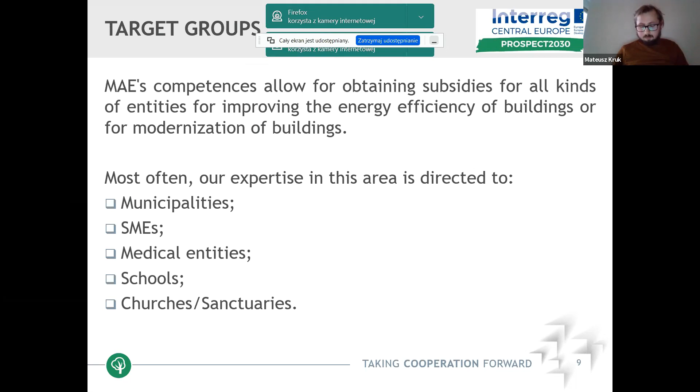For the entities I mentioned, the funds most often used, and one that we mostly use, is the Mazovia Regional Operation Program, and it's for municipalities, powiats, public entities like hospitals, churches, museums, mostly for increasing energy efficiency and using renewable energy sources.

Co-financing is up to 80% of eligible costs for every entity. Of course, there are other funds that we use, and the second one that is mostly used, also for municipalities, is the National Fund for Environmental Protection and Water Management. The other entities are church legal entities, museums, hospitals, and cultural buildings.

Money can also be provided through loans, which are up to 100% of eligible costs mostly, and can be subsidized, up to 95% of co-financing of eligible costs. Of course, it's not for all of the entities that I pointed out, but for most of them.

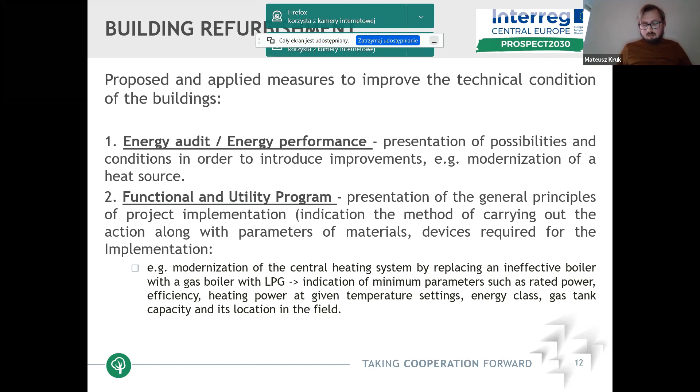A good example for modernization of the heat source would be, as seen beneath, replacing an ineffective boiler with a gas boiler. That should indicate, for example, minimum parameters such as rated power, efficiency, heating power at a given temperature, energy class, gas tank capacity, and its location in the field.

And the final and more refined document is construction design, or detailed design. That document shows the complete specifics of the project, and is also additional to the full drawing documentation. Those documents show how to properly install devices or perform the thermomodernization activities.

Construction design consists of selected fittings and devices. It should also have attached catalog cards of the devices we are using, for example, in modernization of the boiler, pointing out the specific device used. It also should have a site plan and conceptual drawings.

To the construction designs are commonly attached two documents: the bill of quantities and the investor cost estimate for construction works. These documents are linked with each other, because the investor cost estimate is mostly elaborated on the basis of the bill of quantities.

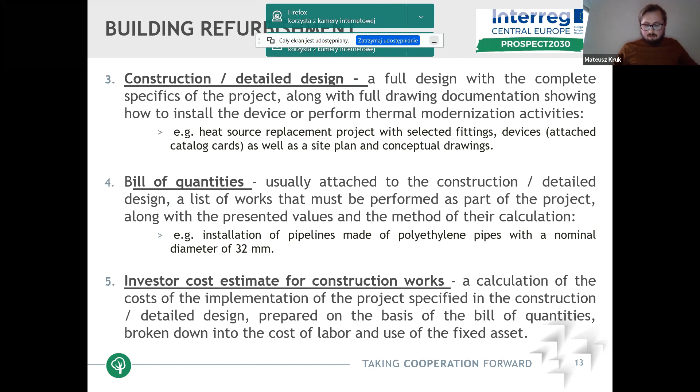Many entities need finance, so many entities look for our assistance just to get financing. For building refurbishment, we can have financing from several methods. We can subsidize from national funds, which were mentioned a few slides before. These funds are the most popular.

There are also loans from domestic funds, which are used when entities have their own financing but want to expand it over a longer period. Commonly, loans are combined with subsidies.

Physical people can also apply for funds to energy refurbish their buildings. So for subsidies and loans, physical persons can also apply for donations or loans.

There is also an energy loan, which is a mechanism for small and middle enterprises based only in the Mazovia region. It is an important ingredient to this whole fund, because it acts as a formal and content operator in the field of energy as an expert. This is a low interest fund that can finance small and middle enterprises to do building refurbishment.

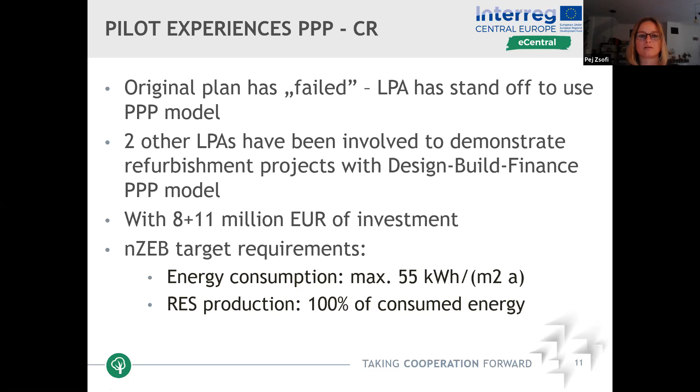So these are ongoing projects, but it seems that they will be financed, luckily.

Regarding the Hungarian case, sorry, is there a question? No, you just have one minute left. Okay, one minute and one slide, it's okay.

So the Hungarian pilot is also a case that failed regarding the selected building for the energy performance contracting refurbishment. It was a small building, partly already refurbished. The negotiations with the ESCO company were very, very long, and the involvement of additional buildings became necessary to ensure a proper return.

But the newly selected buildings were also not perfect, and several months of downtime caused problems due to the municipal elections last year. As I said, in Hungary we have very low energy prices, so it is very difficult to put together an acceptable building package for ESCO companies.

The third pilot case is in Velenje, Slovenia. This is the first case when Slovenian municipalities tried to use a crowdfunding model for public building refurbishments, and this was a brand new story for them.

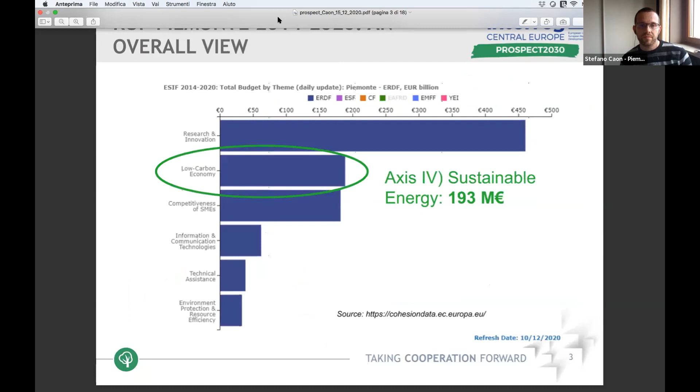The axis for sustainable energy was the second one by resources. In fact, the total amount was 193 million euros. We had 2 main priorities: priority 4B was for enterprises, and priority 4C was for public buildings and public infrastructures. All the calls of the 2 axes are now closed because the money is over.

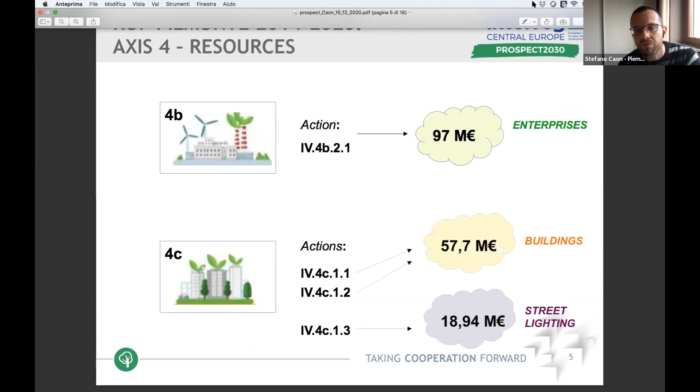But nowadays we have some additional budget coming from the public procurement procedures, and we are currently deciding how to use it and how to allocate it. As you see, every priority is split into one or more actions. The action for enterprises has a total amount of resources equal to 97 million euros. Then nearly 60 million euros were for buildings and nearly 19 for street lighting systems.

Let's see some information about the call for enterprises. The call was opened in 2016. It was recast this year, and the beneficiaries were small, medium, and large enterprises. Not all activities were included. We gave them an 80% loan and 20% grant, with a maximum funding intensity based on the enterprise dimension.

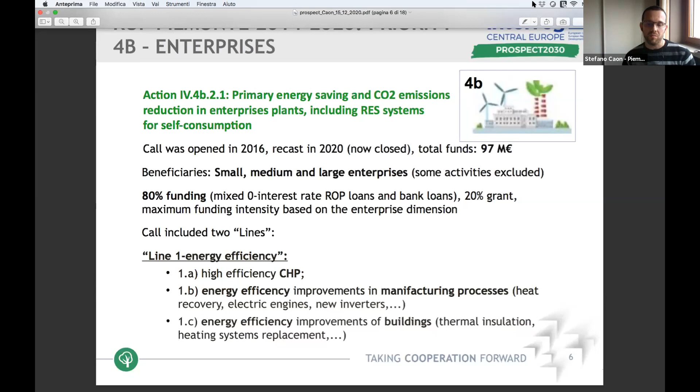The call included two main lines. The first one was for energy efficiency in plants, including for instance CHP, or energy efficiency in manufacturing processes, energy efficiency in buildings, the installation of more efficient components and systems, and the installation of new high efficiency production lines. The second line was for the installation of RES systems.

We had some specific technical requirements based on the category of beneficiary or interventions. For instance, they had to reach some specific energy saving or CO2 emission saving level per euro invested.

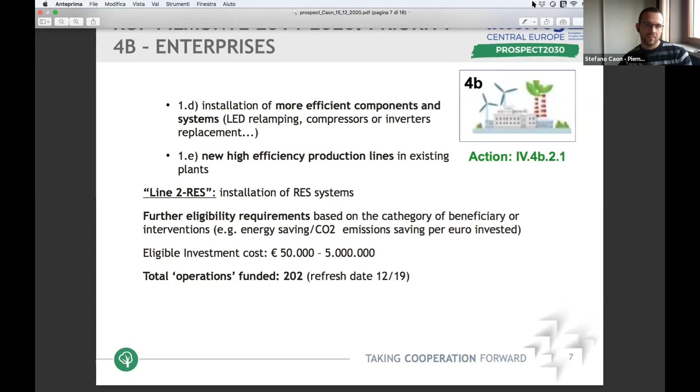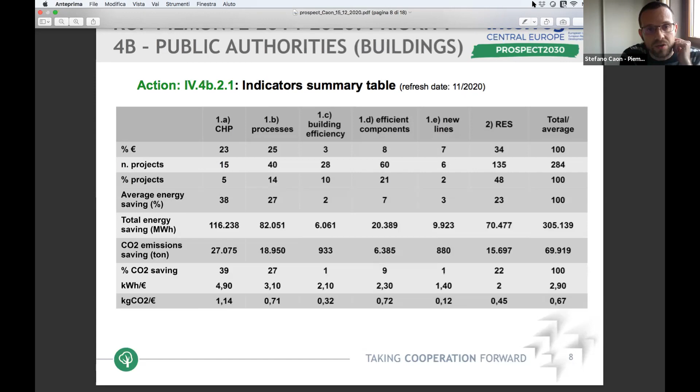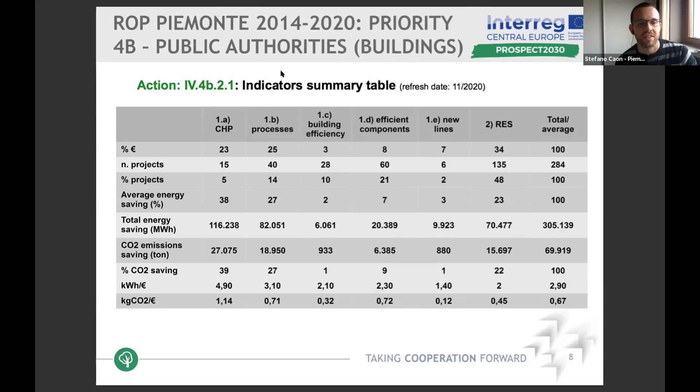Here there are some indicators concerning the enterprise calls. As you can see, we had a very high number of projects and a very high total energy saving, with different ratios of kilowatt hours per euro depending on the nature of the intervention. And the most successful under this point of view was CHP.

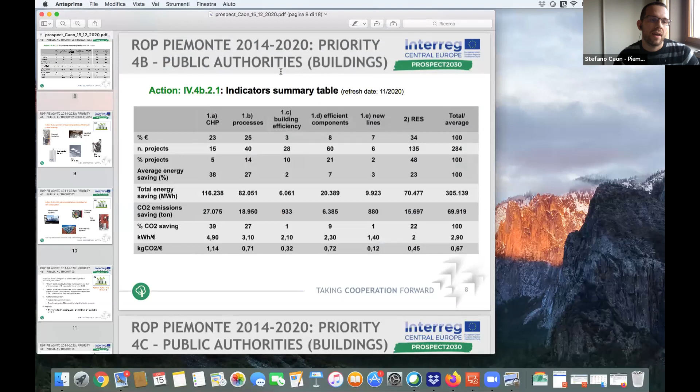Now, I'm sorry. Okay, I tried to.

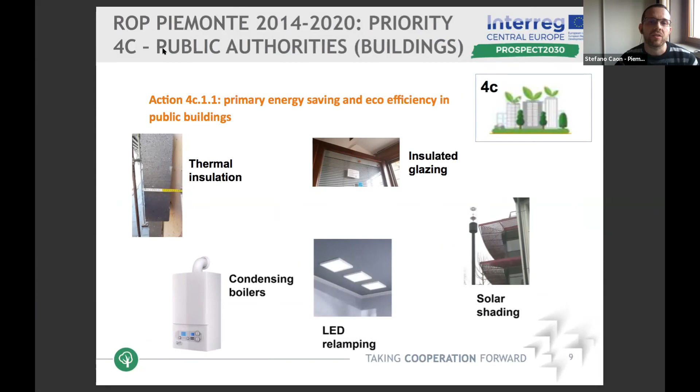Now we have a look at the actions for buildings. For buildings, there were two actions. The first one was for energy efficiency in buildings, and you can see some kinds of interventions like thermal insulation, insulating glazing, condensing boilers, LED relamping, and so on. The second action was for RES system installation in buildings.

You see that for biomass boilers, we had some huge restrictions due to critical air quality in Piedmont region plains. In fact, nowadays we have an infringement proceeding on this topic.

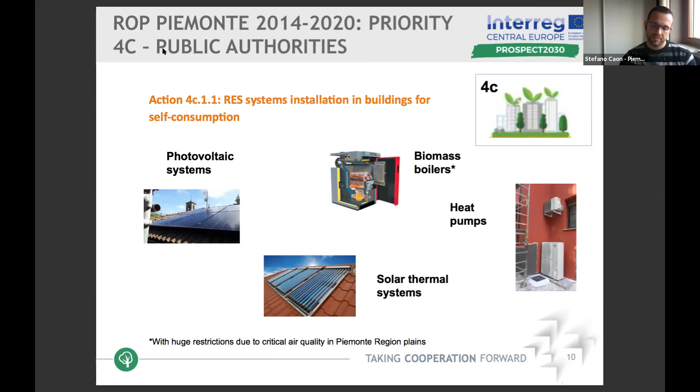For public buildings, we opened in total 4 calls for different categories of beneficiaries. The calls were opened in 2017, 2018; now they are closed. The first one was for small public local authorities, meaning municipalities with a population lower than 500.

I don't remember—I would say 1,000... 5,000. The second one is for large public local authorities and the provinces and the Turin metropolitan area. The third one is for the public housing sector, and the fourth for hospitals.

Let me say that the call I like the most is the one for public housing, because we are speaking about some medium-sized apartment blocks with poor comfort, very low quality. The requirement was to transform them, to deeply renovate them, and turn them into NZEB. So these are very much pilot projects, because during the works, people didn't have to move away—so they keep on living there while the works go on.

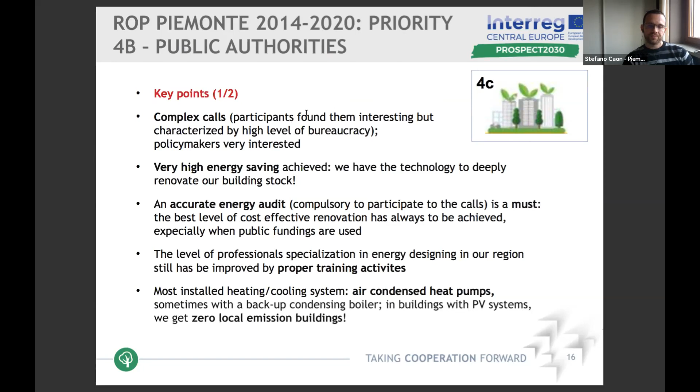We can say that synergy with other public funds is possible, and it was nearly always used by participants, but sometimes it is difficult to integrate different public fundings. So for the next ROP program, in the next 7 years, we have to reach a higher level of integration between ERDF and national funds.

We also saw that the seismic quality of target buildings is very low. This is a big problem in Italy, not especially in our region, but it is surely a problem, and the lack of public resources limits our renovation under this point of view.

One thing I'd like to underline is that in every call we require monitoring for a 5 year period after the works are finished. Our goal is always to verify the effective savings through the analysis of real, available data, because the energy performance you calculate is one thing, and the energy performance you really reach in the daily use of your buildings is another. So we want to give particular attention to this.

I want to stress that what we tried to do is work on the basis of aggregation of demand. So we bundled several buildings together and made a joint procurement involving several municipalities at once, in the same stage. We selected some buildings belonging to different municipalities and created a bundle.

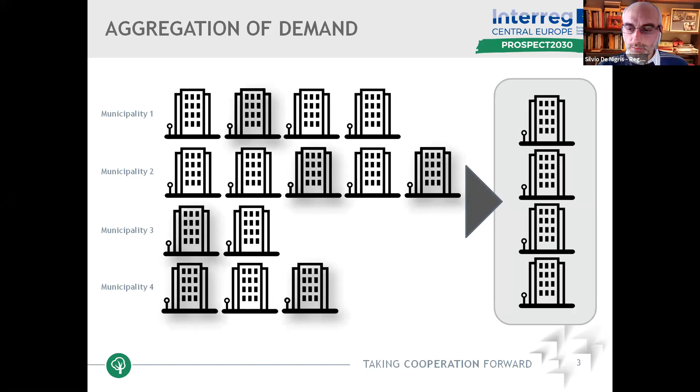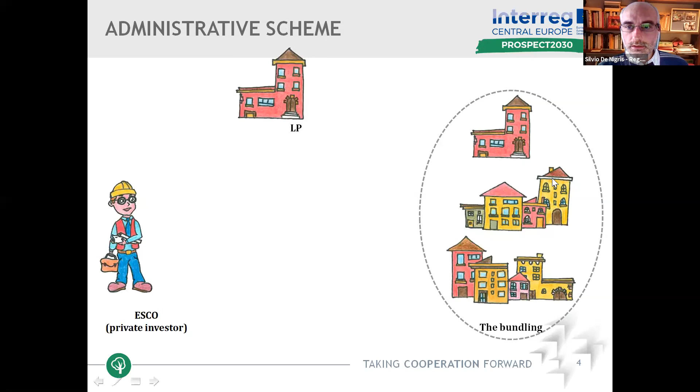This would have been the aim of the procurement, which should be launched as a joint procurement procedure. The scheme is that we have this bundling formed by different municipalities, as you can see in the picture. The next stage is to sign a kind of partnership agreement among them and appoint one lead partner.

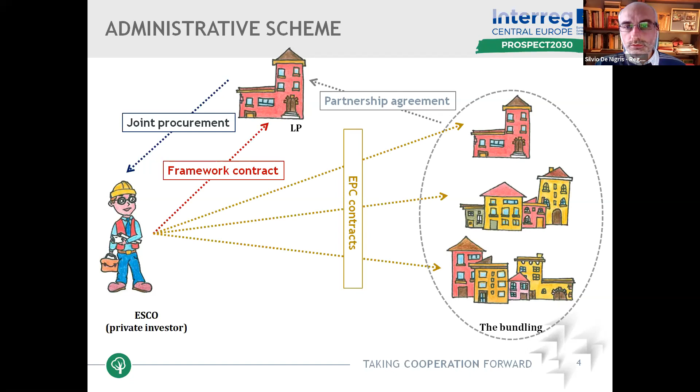This could be one of the members of the bundling, or a super-municipality authority, like a province, acting as a contracting authority that could launch the joint procurement to select the ESCO, the private investors. After the awarding procedure, we have a framework contract signed with the lead partner, and then as many EPC contracts as the number of municipalities involved. So if we have, for example, 4 municipalities in the bundling, at the end we have 4 different EPC contracts based on one single public procurement procedure.

This was the scheme we applied, and we had some experience over the past 5 years. Some were successful and some were a failure, as Sophie already presented. It's very difficult to always be successful in this procedure, but we did have some good examples. I don't have time to go into all of them, so I selected the most successful one: an energy renovation of 18 public buildings belonging to 5 different municipalities, mainly schools and some office buildings.

We signed an energy performance contract of 13 years duration. The first year was to implement the works, and then 12 years for maintenance of the contract and the buildings. The awarded ESCO was Bosch Energy Solutions Italy, a big company. The overall investment in energy efficiency was roughly 2.5 million euros plus VAT.

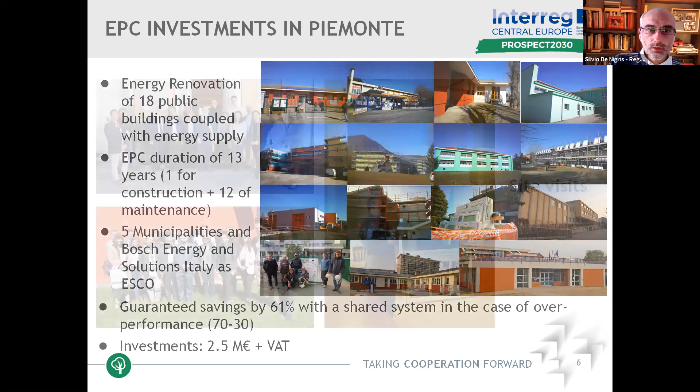We had guaranteed savings of about 61%, with a shared system in case of overperformance. So in case of more than 61% savings, 70% of the extra saving would go to the ESCO and 30% to the municipality. We made some dissemination based on these buildings, also because one of this bundling was one of the first nearly zero energy buildings implemented in Piemonte, so we had the possibility to make some promotion.

So just a few points in conclusion. EPC can be a solution. In Italy, the market is developing, even though there are still some bottlenecks and administrative barriers, but maybe this would be eased in the future.

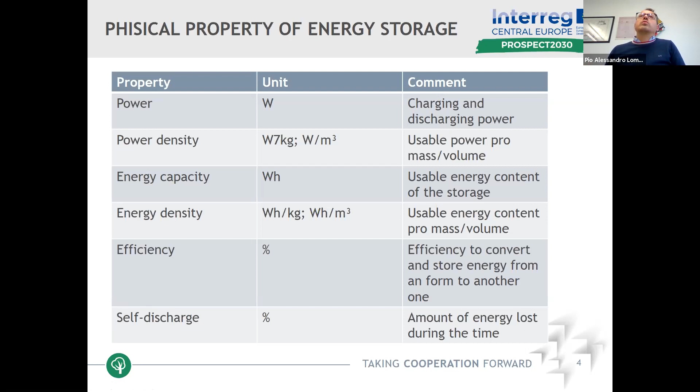Why do we need storage systems? I think we have already given, in the last prospect meeting, a good overview of how the European energy sector is changing.

We know that by 2050 we aim to decarbonize the power system, meaning we aim to generate almost all the electricity and other energy, like thermal, using renewables. Most of the renewables are volatile, like wind and sun. Some are not volatile, like biomass. But for volatile energy sources we need flexibility, meaning that with variable generation we need a component in the network able to capture such variability. Energy storage systems may be one of the solutions we are trying to integrate into the system.

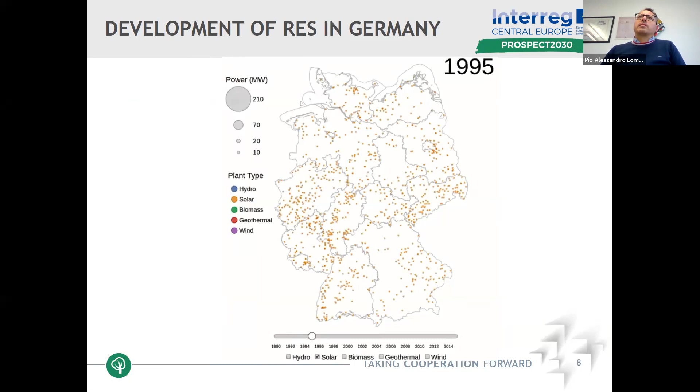You see how the system in Germany is going to be decarbonized, and how renewables have developed there in the last 15 years or more. You see that more and more we have decentralized generators on the network, like photovoltaic, wind parks, biomass, geothermal, and so on. As I said, these technologies generate electricity in a volatile way.

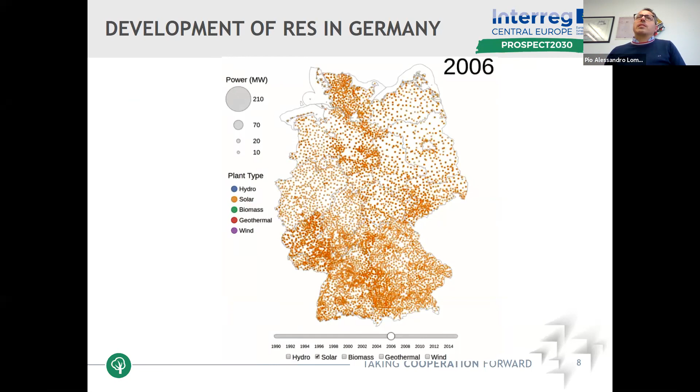Another important point is that the load we have is not constant. During the day we have different peaks, and the power or energy we consume is mostly covered by conventional technologies like nuclear and coal power plants, used as base load. Then there are other technologies like gas turbines and combined cycle gas turbines, used as mean load, while photovoltaic and wind parks are generally used as base load because they are not controllable.

Since we have a variable load, we also need to balance that variability, and therefore storage systems may be used, and are already used today, to control such variability. System operators may require storage systems for better balancing the power generated and the power demanded.

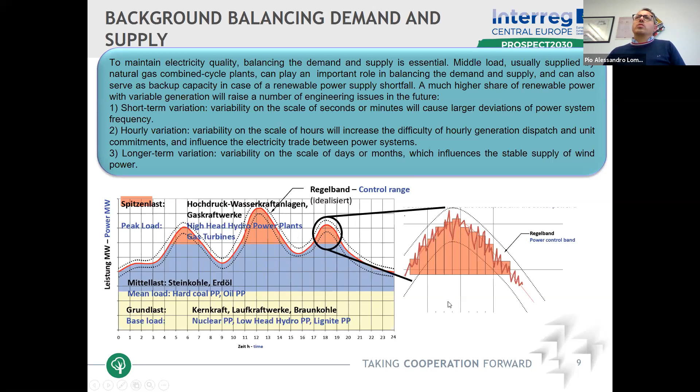Another reason we need storage systems: for photovoltaic and wind, for renewables, you see how large the forecasting error is on the day ahead. If you forecast one day before to generate, for example, 1.5 gigawatts, and then you don't generate it, it's a big problem for the system operator to find that 1.3 or 1.5 gigawatts that was forecasted but doesn't feed the network. Even though forecasting tools are improving using artificial intelligence algorithms, they are not 100% efficient.

We still have prediction error, which can range depending on the conditions where the technology is installed. For example, photovoltaic installed in Germany has a different forecasting error than the same plant installed in the Sahara Desert, because weather conditions are different. In Germany, for day-ahead forecasting of photovoltaic, we have something like an 18% forecasting error.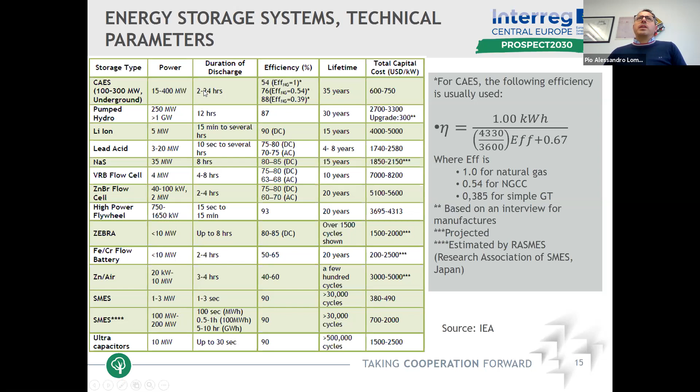I would say that in recent years, lithium-ion batteries have definitely gotten cheaper than what is depicted here in this table. For the other technologies, more or less, things have not changed too much.

One of the most used technologies is pump hydro. Pump hydro considers two reservoirs. Between the two reservoirs, we have a pump turbine, which works as a pump.

If the system is charging, it takes water from the lower reservoir and pumps it up to the upper reservoir. It works as a turbine if the system is discharging, and the water flows through the pipelines and goes to the lower reservoir. So in the charging phase, the system consumes electricity and stores it as gravitational energy. In the discharging phase, the gravitational energy is converted into electric energy, and the turbine feeds the network.

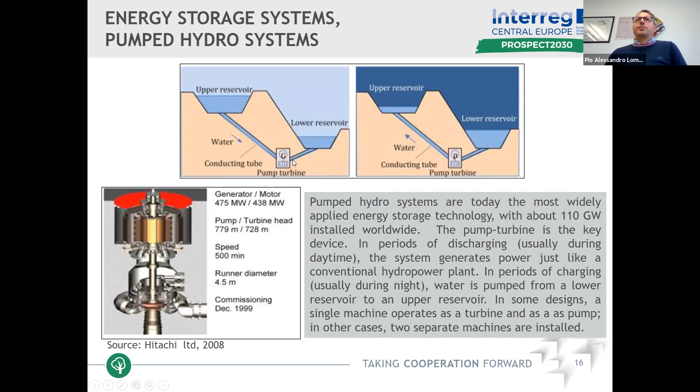So this technology is the most used worldwide. As I said before, maybe someone is writing here. I don't know, it's for me.

As you see here, if I'm charging, for example, 100 units of electricity, at the end what I can discharge is something like 84.5, 70% of what I have given as input. Because I have losses on the transformer, losses on the motor, losses on the pump, and fluid dynamic losses - this is the charging phase. On the discharging phase, I have similar losses. So at the end, what I can give to the network is 70% of what I have taken from the network. You see also here the equation for how to calculate it.

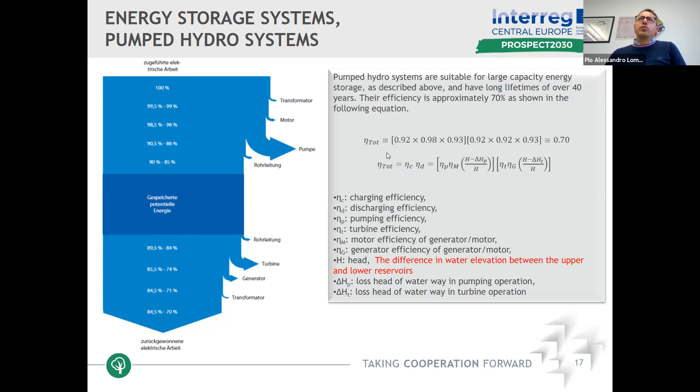In the last years, the trend is to increase the energy density. The energy density is given by this equation, which depicts the difference between the two reservoirs, upper and lower, multiplied by the gravitational constant. So the higher this difference, the higher the energy capacity that the system can store.

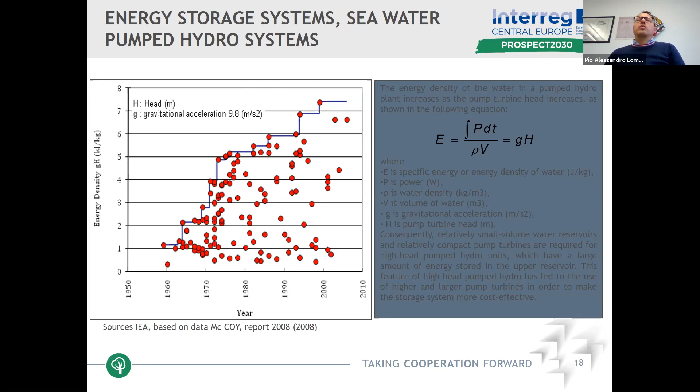You see how the systems change, how new projects try to increase the energy density of the system. What's important to say is that these new projects are mostly in Asia or South America, because in Europe we don't have any more places to install pump hydro storage systems. And also the acceptance of the population is not so high.

What is new in Japan, you see, is a new system in which the sea is used as the lower reservoir, and on the island they have built an upper reservoir. Between the sea and this upper reservoir there is some channel through which the water flows. In that case we have salt water and not fresh water, and as you see, the costs are larger, higher than in the case of conventional pump hydro systems.

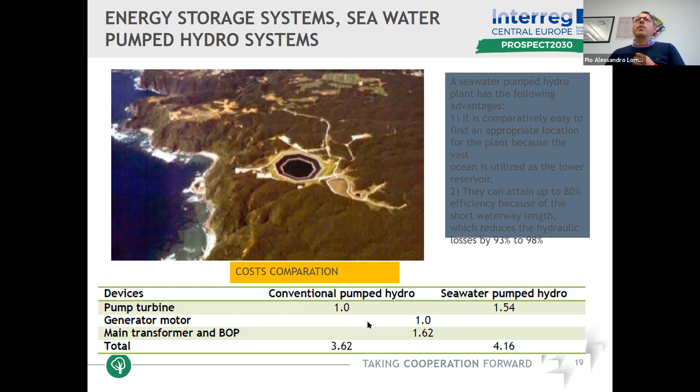Another technology going to capture a lot of attention is the compressed air storage system. We have a compressor driven by a motor. The motor takes electricity from the network. The compressor takes air from the ambient and compresses it. The compressed air is cooled, and then the cooled compressed air is stored inside caverns, generally salt caverns. This is the charging phase.

In the discharging phase, compressed air stored here goes to the turbine. It is burned together with natural gas, increasing the temperature, and the compressed air with higher temperature, because of the combustion, expands inside the turbine. The turbine drives a generator, and the generator feeds the network. This system is more or less 40 years old, it's not new, and it's not a 100% energy storage system because we use fuel here.

In the last time, we are investigating a new system called advanced adiabatic compressed air storage system. What you see here is a pilot idea of the Adele project, which maybe will be installed near Magdeburg in Germany. The difference is that we have the compressors and the turbine like before, but we don't cool anymore.

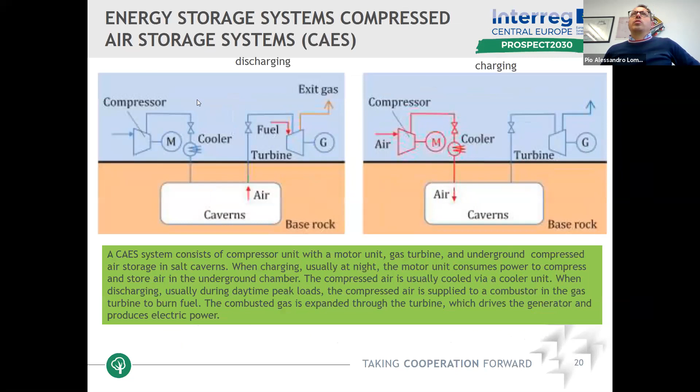So we cool the compressed air, but the heat energy that we have is stored inside two thermal storage systems. It's not released to the ambient like before, but we store the thermal energy generated during the compression phase. Then the cooled air goes to the cavern, and when we want to discharge, the compressed air increases its temperature going through the thermal storage system without burning any fuel, and then goes to the turbine.

So such a system is a 100% storage system - we don't burn any fuel. But of course we have some problems, mostly with the thermal storage system, because the temperature we need to reach is about 600 Celsius degrees, and the materials that may be used for storing thermal energy at that temperature for a long time should be different from the materials we use today, like oil or hot water. In this case, they are thinking to use some ceramic materials, and it's not sure if such materials can be used for 20 years, so the lifetime should be at least 20 years. Therefore, the designers are still considering other materials for the thermal part.

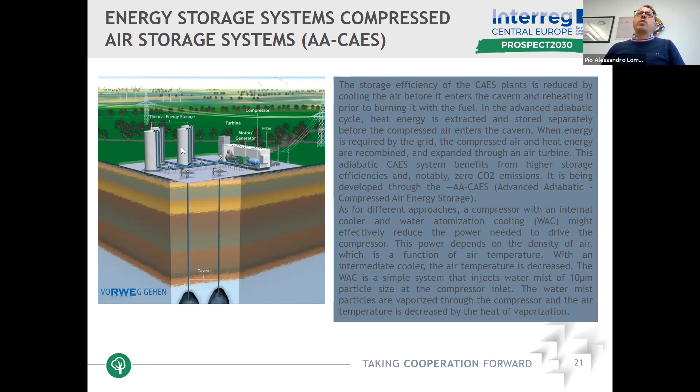But anyway, in Germany, we are taking into consideration this new technology.

Another technology which uses mechanical energy for storing electricity is the flywheel. You know what a flywheel is, because all conventional cars have one near the engine, used to compensate the alternative movement of the pistons into rotative movement. A flywheel is a disc, maybe heavy or maybe light, which rotates around an axis. The energy you can store depends on an equation: it depends on the dimension of the system, how large and how heavy it is, and what speed it runs at. So larger and faster the disk rotates, the more energy you can store.

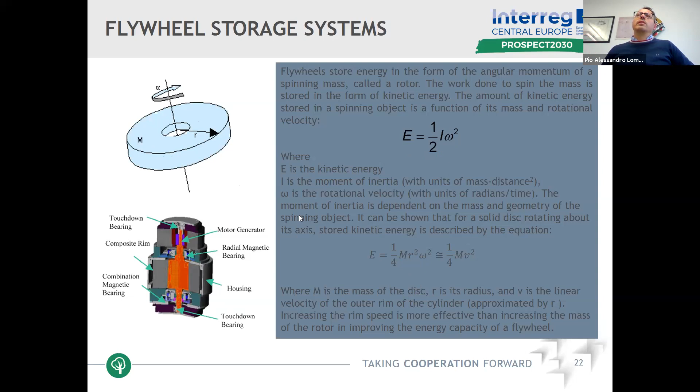There are two kinds of flywheel technology. We have low speed technology, which runs up to 10,000 revolutions per minute, and high speed flywheels, which can run up to 100,000 revolutions per minute. Of course, if you have a disk rotating at 100,000 RPM, you cannot do it with steel, because the material cannot resist the stress that such high speed gives. Therefore, for high speed, they use carbon fiber based materials, which are very light but can rotate at very high velocity. For conventional flywheels, we can use steel materials, but the velocity should be smaller.

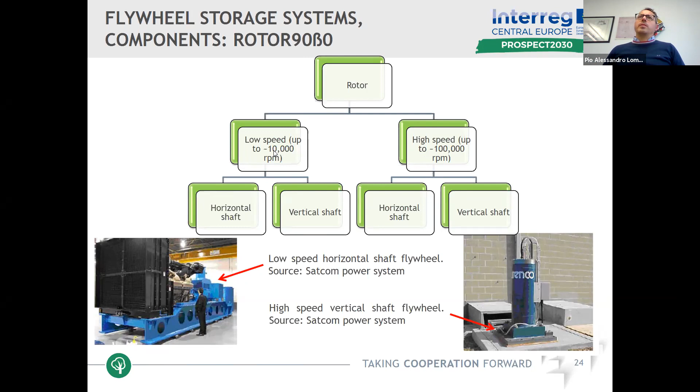As for electrochemical technology, everybody knows what a battery is. A battery is made of two electrodes, connected through an electrolyte. Generally the electrolyte is in liquid form, but not always - you can also have a solid electrolyte. Between the two electrodes we have a membrane, which works like a filter, allowing particular materials or electrons to go through to the other side of the cell, and avoiding that other materials can go through.

Batteries are more or less more than 150 years old. Of course, in recent years we have introduced new electrodes, new materials, new membranes, and new electrolytes. Generally we have two kinds of electrochemical storage systems, but the most used at the moment are lead-acid, nickel-cadmium, lithium-ion, and sodium-sulfur technology. Some of them we will see here.

Very important for a battery, mostly if used for mobile applications, is the specific energy density, which is measured in watt hour per kilogram. This is important because if you use it for electric cars, for example, you don't want to transport a lot of weight with you.

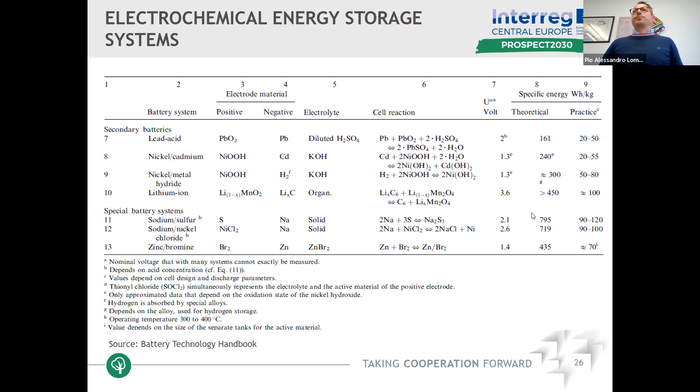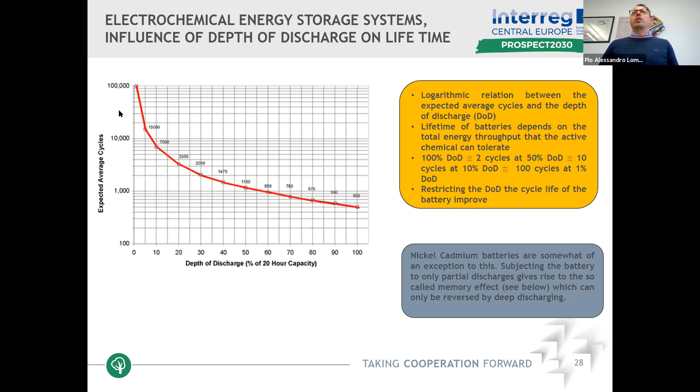A second important aspect is how you operate the system. If you charge the system at 100% of its physical capacity and discharge it to 0%, making the system empty, the lifetime will be relatively small. If you charge the system at 60% of physical capacity, the lifetime of the system increases. If you shorten the capacity that you charge and discharge, you increase the lifetime of the battery. This is very important because increasing the lifetime, you can shorten the payback time of your investment. This is characteristic of almost all electrochemical storage systems.

Very important, or very particular, is the high temperature NAS battery. In that case, we have two kinds of electrodes, sodium and sulfur, and an electrolyte which is solid, beta alumina ceramic. This kind of battery works at a very high temperature, therefore it's called a high temperature battery. The operating temperature is 300 to 350 Celsius degrees, and at that temperature we have molten sodium, which is the electrode.

Such kind of battery are very good because they are able to be operated both as energy management as well as for power applications. There is at the moment just one company which is able to build such storage system, which is the Japanese NGK.

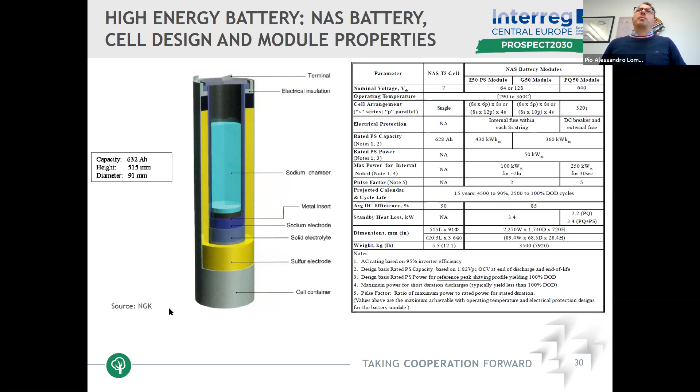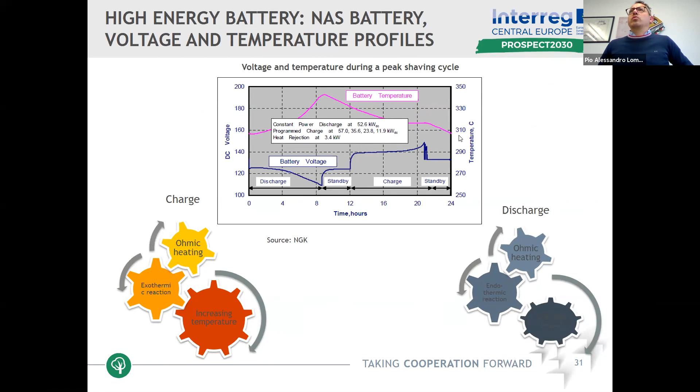This technology is good because it's very flexible, so you can use it both for power application as well as for energy management application. Here is an example of how to operate the storage system. When you are charging, the temperature increases. When you are discharging, the temperature increases. When you are charging the system, the temperature decreases. But the operating temperature is higher than 300 Celsius degrees, as you see on the diagram.

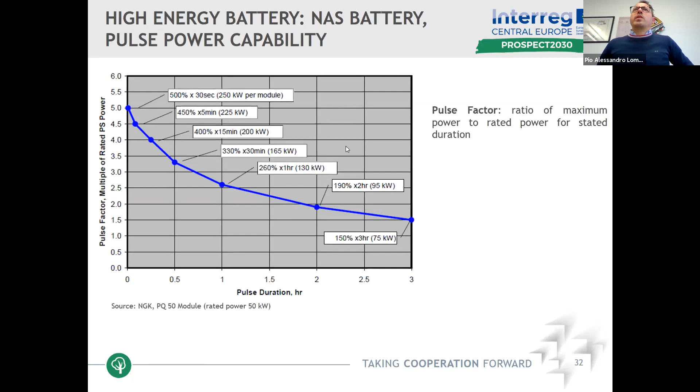Thank you. These last two slides would be my questions, because you showed the summarization table of the different storage technologies, but I missed the investment cost or the return on investment. What you showed is how much it costs for 1 megawatt. So if you are considering to use a storage system, you have to first of all...

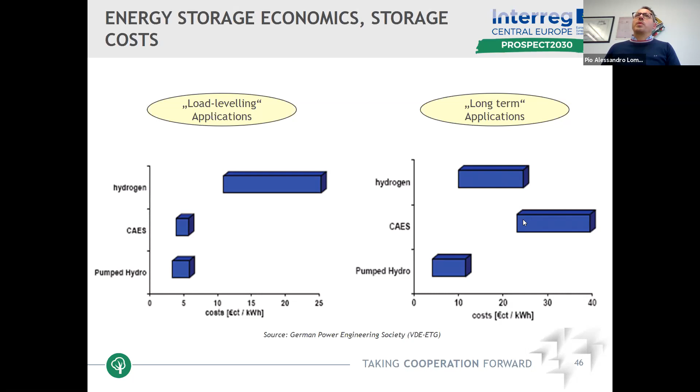And then the application. If you look, we have done some different study cases. Depending on the application, we have costs which range between 5 and 25 cents per kilowatt hour. Or if we are making a load leveling application, storing the energy for the long term, then we may find that some technology like hydrogen for long-term application may be more competitive than compressed air. If we are making peak shaving, then we have, for example, NAS battery.

They are already today competitive with the pump storage system, which is the cheapest one in terms of operating cost, not in terms of investment cost. So the answer is: you need to identify the application, you need to select the technology, you need to calculate the investment cost, you need to estimate the operative cost, and then you have to take the decision on which technology should be used for you.

So it's not a simple choice. Yeah, of course, you need to take into consideration different criteria. But we have done many different studies on it, so it's not so complicated, Veronica. Maybe there's not time now to explain how to do it, but it's not so complicated. And what you want to use it for, I guess. Okay, thank you, I'm thinking so many questions, but I guess I need to learn a little bit more about this subject. And yeah, I will from you. Just, I don't want to keep all the others.

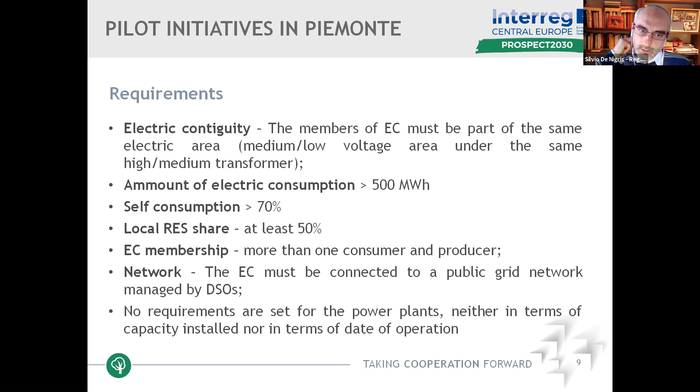Based on this law, some pilot initiatives have been launched, with a bottom-up approach, let me say. These are projects coming from local authorities. Some of them are quite small, and these projects are supported by the region with financial support and coordination activity that we are managing inside a European project called SHREC. It's an Interreg project, but I think I don't have it here. I go to my final slides.

Thank you very much, Veronica.

So also at national level, something is happening. The Italian government anticipated the adoption of the Renewable Energy Directive with a pilot initiative, let me say, allowing the creation of energy communities with some very strict requirements. So we can have an energy community, but now only with renewables with a capacity below 200 kilowatts.

There is this constraint to be connected to the public grid network, but the electric area, contrary to the original concept, is limited to the low voltage grid. This is limiting quite a lot the possibility to have a large energy community. And if we speak about collective self-consumption, this is limited only to the same building.

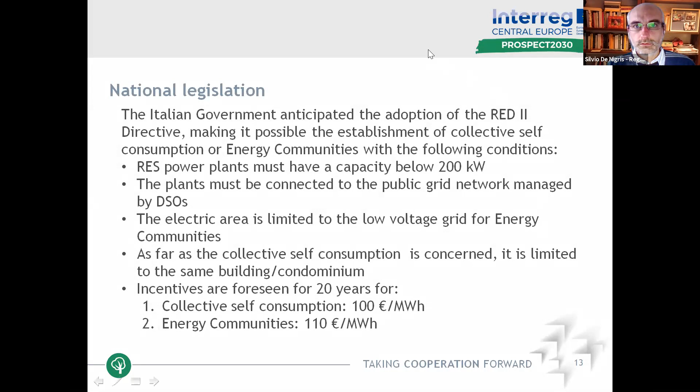I really rushed a bit, but I wanted to provide this overview of the situation. Thank you very much.

Thank you very much, it was interesting. But you are usually doing this at the local level, in the energy communities, because it should not be at the region level? No, of course it's at the local level, the energy communities, but as a region we are supporting them from different points of view, with some measures. We are trying to stimulate the creation of these energy communities, even though these are just pilot projects nowadays, because the legislative framework is not stable yet, let me say, so we should have a look at what happens next year to have a clear picture.

Next year, hopefully, we will have some pilot projects here in Hungary as well. But I think everyone will be happy to share some advice.